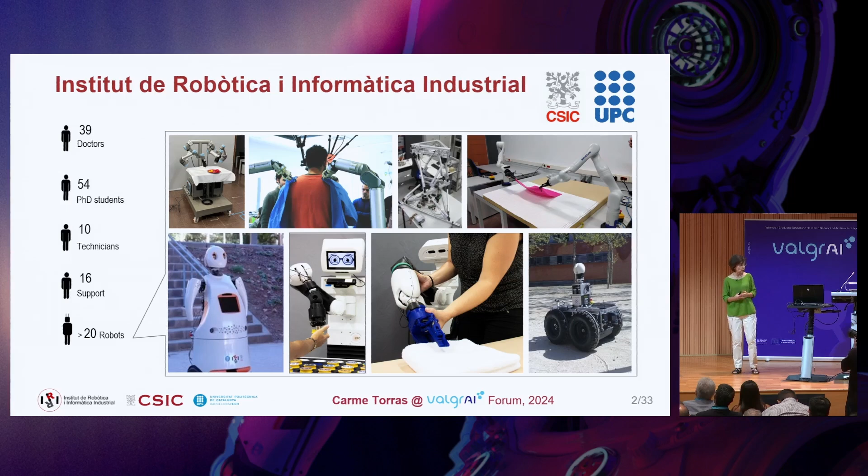As you see, manipulating clothes, helping people to dress, helping to fold clothes, etc. This is my research group. It's called RobIRI, namely Robot Perception and Manipulation at IRI.

We are a large group. At the moment we are 68 people, as you see. And I always like to highlight in red the women in each category, because we would like to be many more, even reach parity, but it is proving difficult. We don't reach 20%, which is very low.

So I take this forum to make a call. Most of the women here, I guess, are devoted to artificial intelligence or related fields, but it's important that more women get into technology, into developing technology, because technology is the future, so we'd like our perspective to also enter technology development.

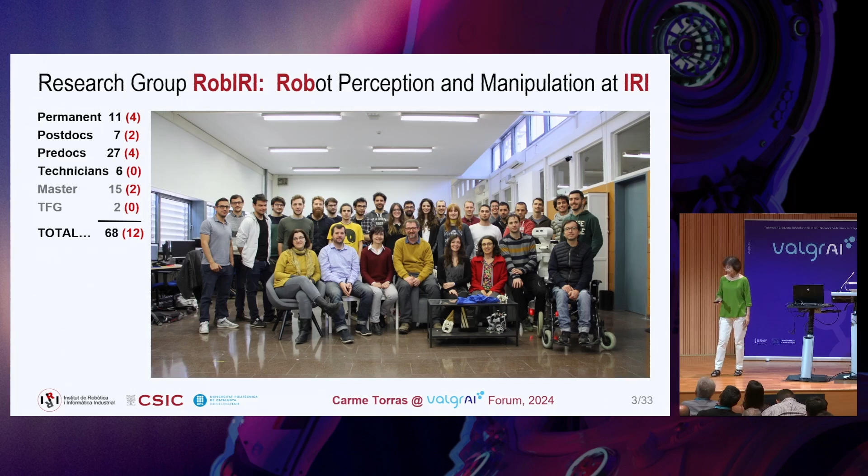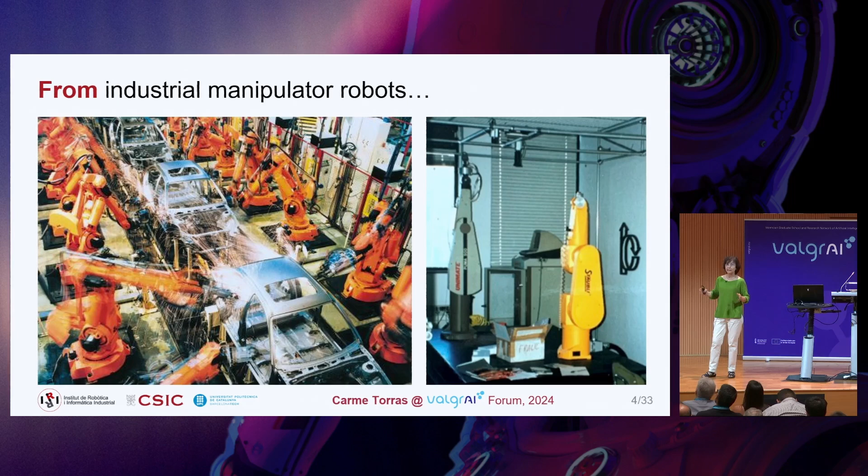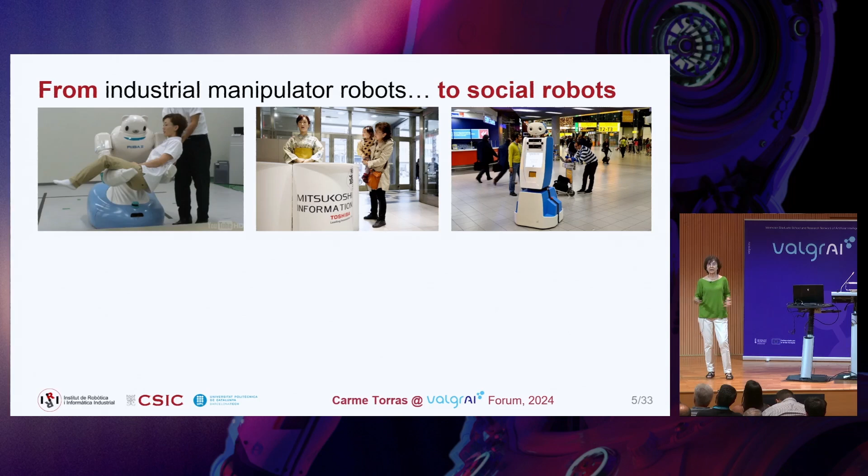Our group started in industrial robotics, in production lines, and the trend, like 15 years ago, was to move from industry to social robots. So there are robots that, for instance, move people from a wheelchair to the bed. Robots that are receptionists, that guide in large spaces like airports, and these are a bit more conflicting type of thing. Robots that are companions for children to play, robot nannies, and also robots that help teachers at school.

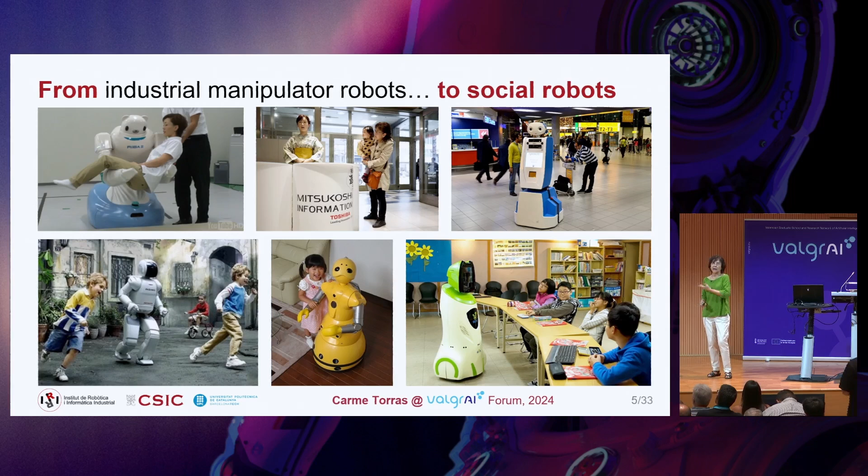Some of these are real in the sense that they are operational already. Within our research group, we got a project. We made this shift from industrial robotics to social robotics, thanks to this ERC project called Cloth Manipulation Learning from Demonstration, where we could build this lab, the largest one, in which there are several robots.

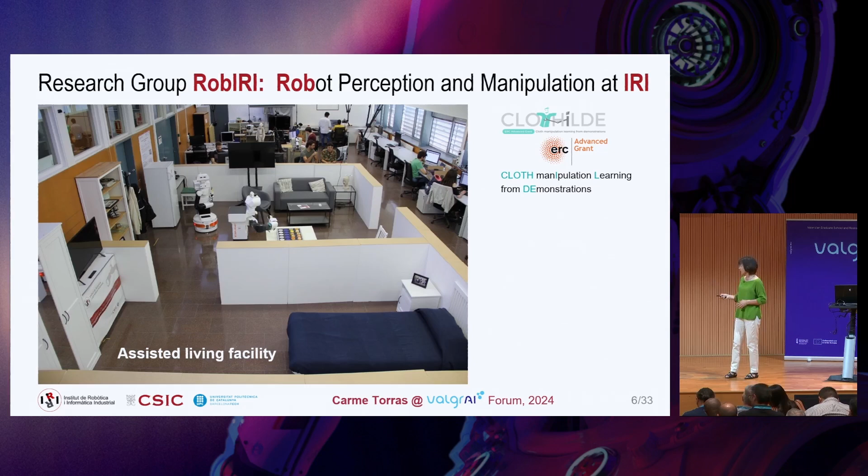At the end, we built this mock-up of a flat with two rooms: a bedroom, where you see a bed and a cupboard, etc., and then a living room, kitchen and dining room, in which you see two robots that give some service. This will help me show you some of the prototypes we have developed in this environment, thanks to other European projects we have got.

In this move from industrial robotics to social robotics, new challenges appear, most of them related to artificial intelligence. For instance, in industries there are expert programmers that program fixed sequences for the robot arms. In social environments, in assistive environments in particular, the caregivers maybe do not have programming abilities or even technological ones. So it's important that robots be easy to instruct.

Moreover, it's important to personalize. It's not production chains, but adapting the behavior of the robot to every person that needs some care.

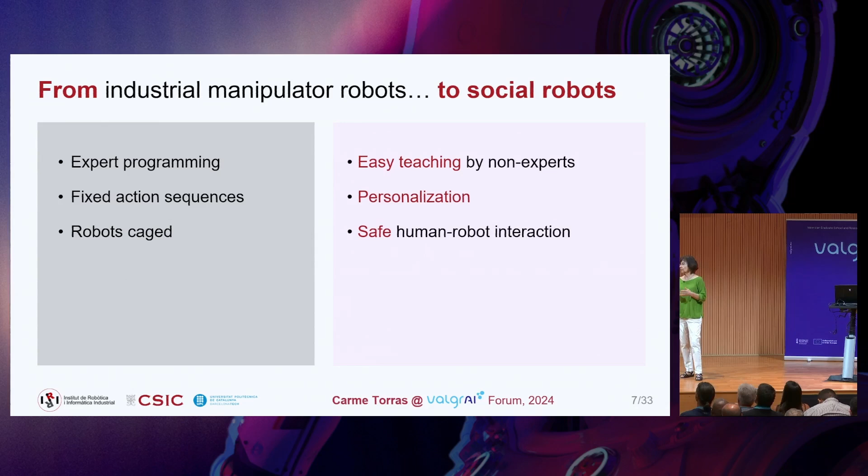In industrial environments, robots are usually caged with sensors, and as soon as someone enters this space, everything stops. Of course, if we like to help people dress or eat, or feed people, robots are very close to people, so we cannot stop activity. So it's important for robots to be intrinsically safe for humans.

Another particularity is that in assistive environments there are lots of textiles, clothes, and maybe cables or all sorts of deformable materials. While in industry, what has been basically solved is the manipulation of rigid objects, because for rigid objects, with just 3 degrees of freedom of position and 3 of orientation, if you have the model of the thing, the location and orientation is fixed. While for deformables, they have an infinite dimensional state space, so it's a much harder problem to plan motions in this space.

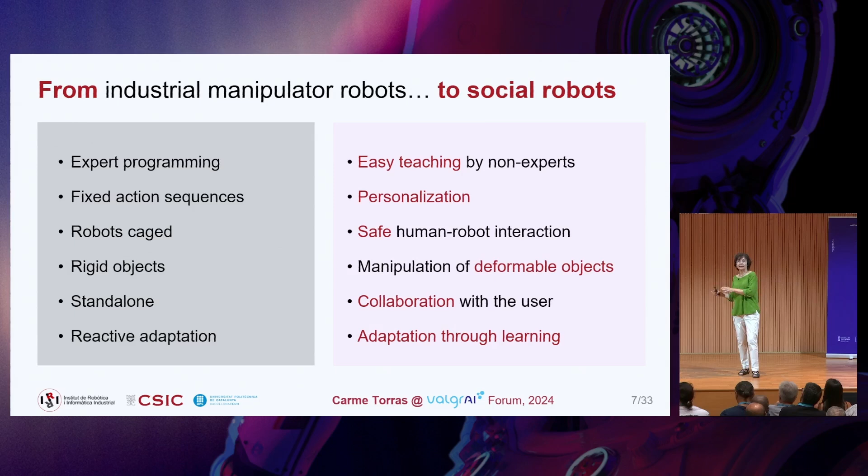The robots in industry are usually standalone. They work independently of people, separately from people. In social environments, they are constantly interacting with people, so they need to collaborate. Finally, the type of adaptation or learning is very different. In industry, it's just reaction to changes in the environment, while in assistive environments it is very important that they adapt through learning, lifelong.

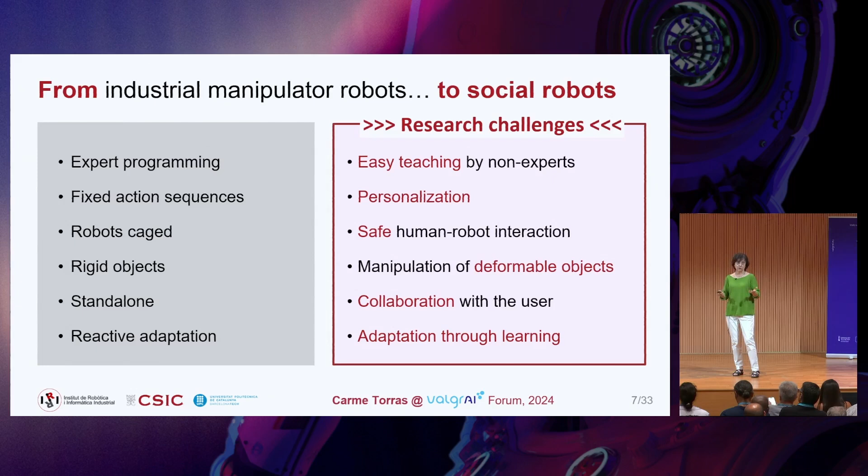So you see, these are the important research challenges we are facing in social robotics and assistive robotics in particular. I will exemplify each of these challenges with one possible solution we are developing.

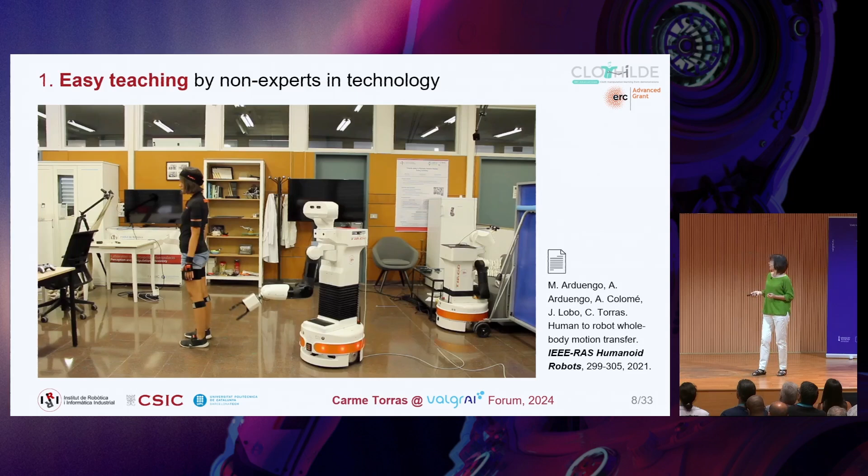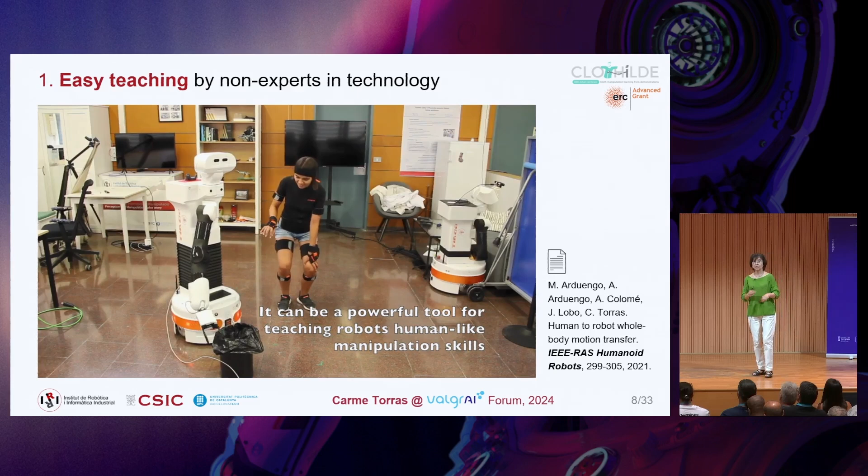For instance, for easy teaching, in our lab we teach the robot through imitation of a person. You see this girl, she wears motion capture devices on her arms and legs, and essentially the robot mimics her movements.

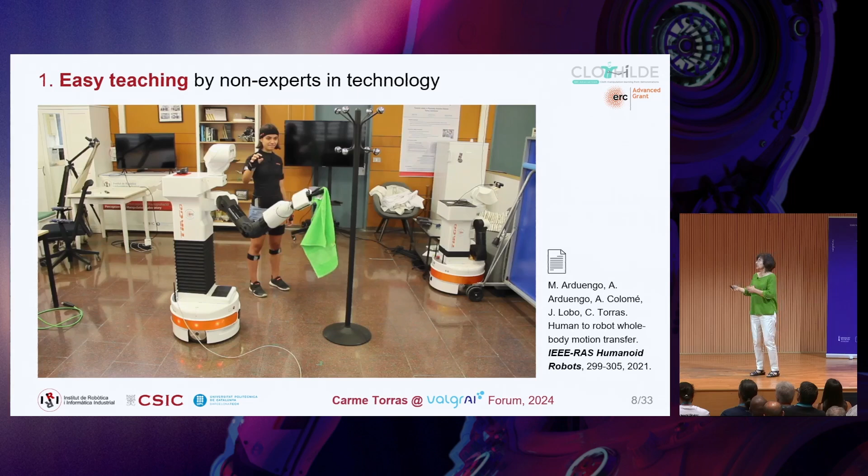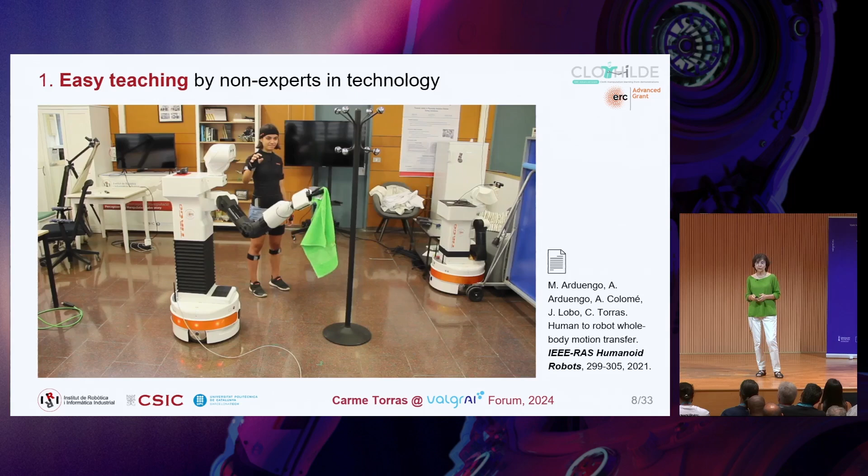This requires a transfer from the kinematics of the person to the kinematics of the robot. Afterwards, the robot can improve and make the motions more smooth through, for instance, reinforcement learning. I put on the side the different papers for those of you that would like to know more about each of these works.

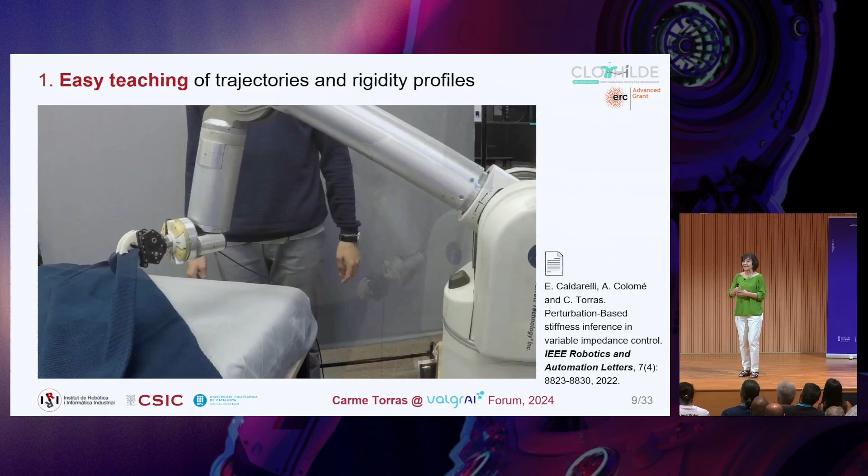Easy teaching is also involved in teaching forces, or what we call rigidity profiles. Because, for instance, to make beds, there are some motions in which you need to be very stiff. The robot needs to be very stiff in order to remove wrinkles, for instance. But there are other motions in which it can be free, meaning it's not necessary that the robot stays rigid, even if it's disturbed, nothing happens.

Oh, sorry. What happened here? Well, it's not very important, but maybe I did something wrong. This one works.

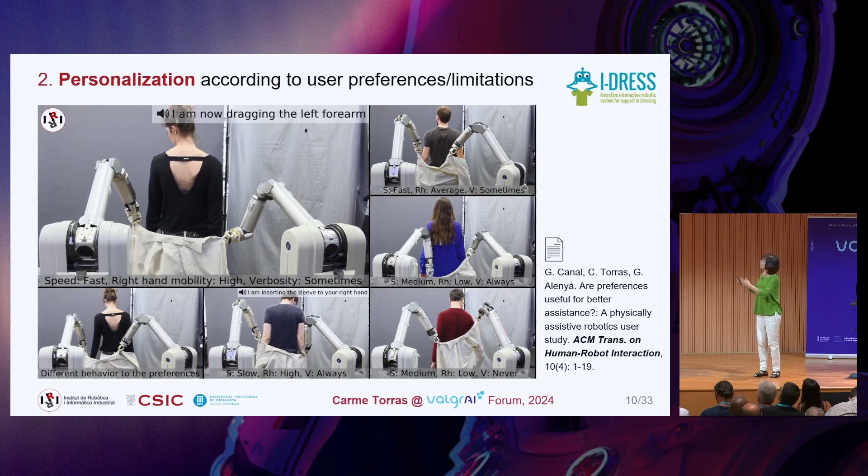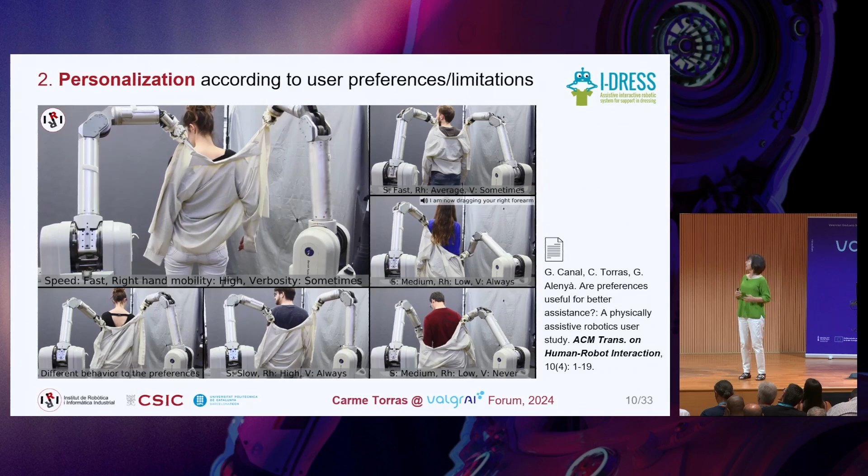We jumped to another prototype. I'm showing another challenge, which is personalization in dressing people. You see that there are several different things that can be adapted, for instance the speed at which someone wants to be dressed, what mobility limitations they have, for instance left arm or right arm, whether they want the robot to explain every motion or they can be quicker, and each one is taught differently. Well, our robots speak.

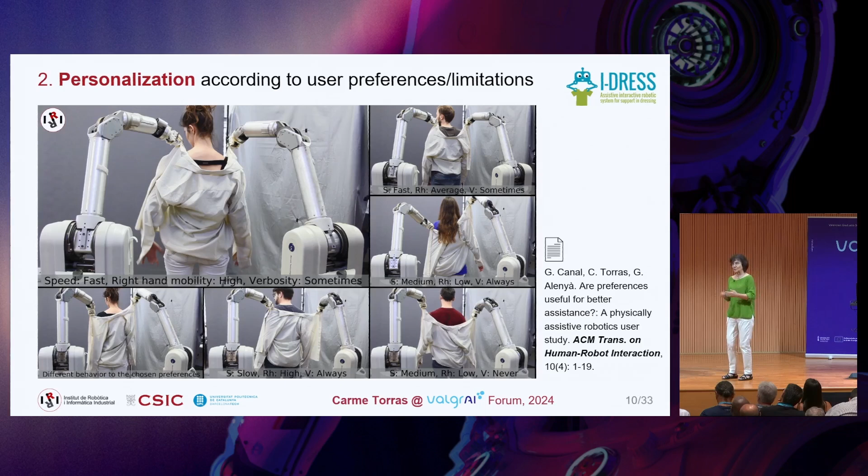I didn't put the voice on because I cannot speak on top and it gets a bit slow.

Another type of personalization is that usually this type of robots will come from factories with a repertoire of trajectories and actions already pre-programmed, but they need to be adapted to the particularities, physical and psychical, of people.

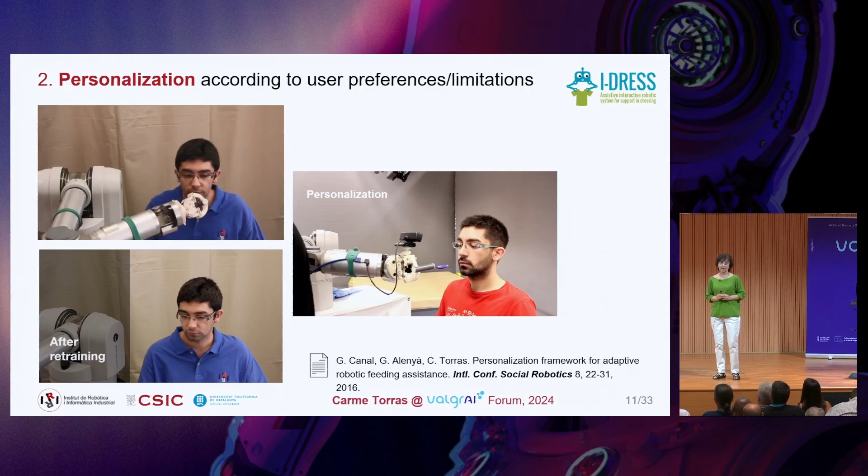So, for instance, in a prototype of a feeding robot, we applied this. This is how it came from, presumably from the factory, and you see it's not very comfortable for the poor guy. Then it was personalized. In this case, the caregiver could adapt the timing and the different positions of the arm, and then after retraining, it's much more comfortable for the person to eat.

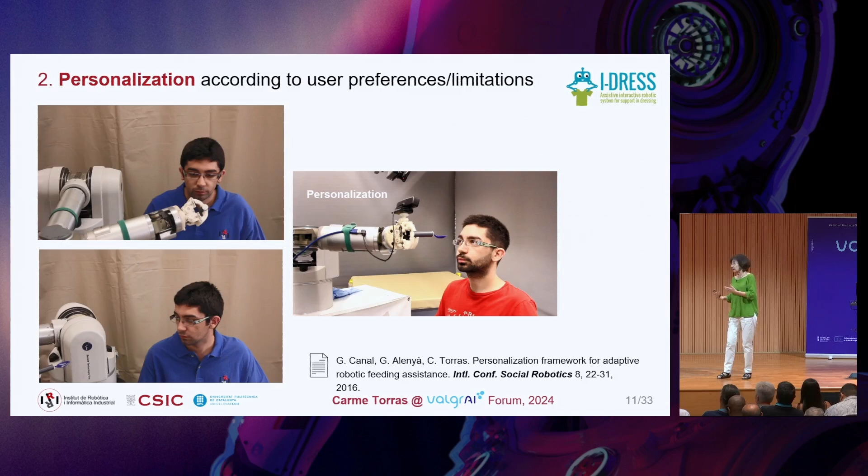So this is just adapting a physical type of thing, but the same thing can be done in cognitive personalization. Coming to the next challenge, which is safety, very important in this context.

We exemplify this through putting a scarf on the neck of a person, without... well, I don't know the name now, but you understand. You see in the left one how the caregiver teaches how to put the scarf around the neck of the mannequin in this case.

The robot can exercise. There is a camera on top and a cost function that measures how well the robot is doing, and the robot can keep exercising the skill until it is good.

And then what is most interesting is the right side, that you see black now, in which it puts the scarf on a person. This person, you will see, can disturb the robot, and the robot keeps doing the task without making any harm to the person.

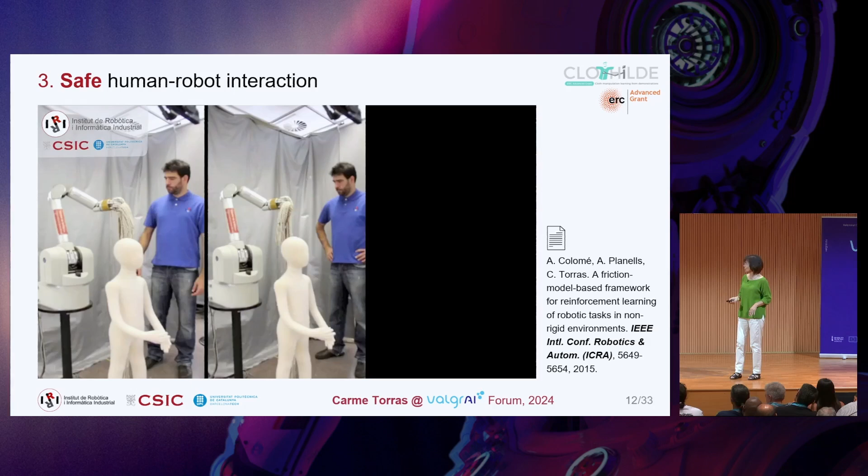They run in parallel, and this is why I'm telling you what you have to look at in each of these frames. You see that on the right, the person disturbs the trajectory, and the robot keeps doing the task.

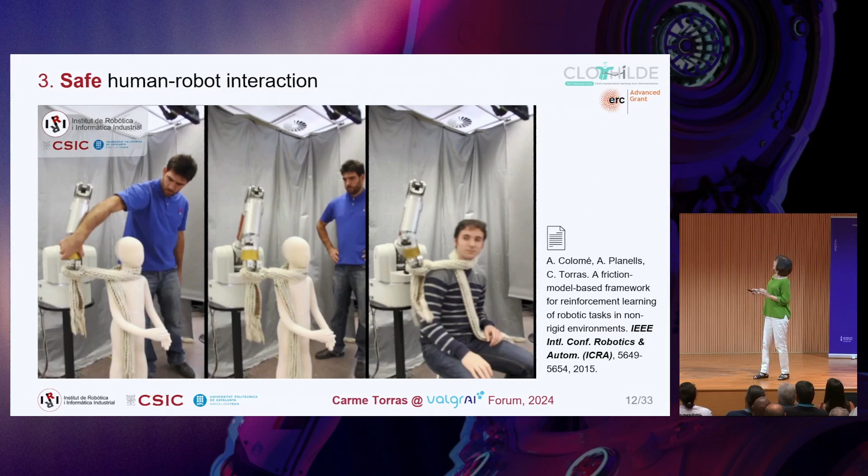Okay. Well, he was taking the risk because he's the one developing the prototype.

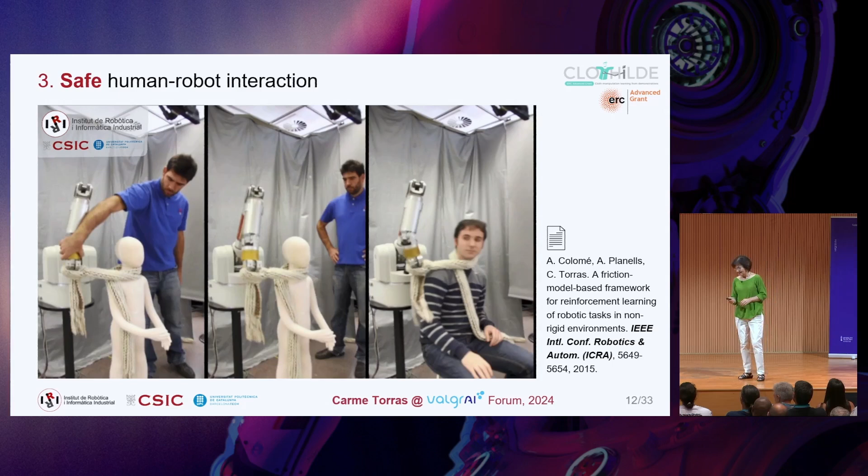Another huge area of research is the perception and manipulation of deformable objects, as I mentioned before. This entails even introducing new types of manipulation that for rigid objects do not have any meaning.

For instance, when we put a tablecloth, we sometimes take one corner, then slide through the border to reach the other corner, and then we do like this. This wouldn't make sense to do with a rigid object because the corner is always at the same place. So new manipulations need to be added.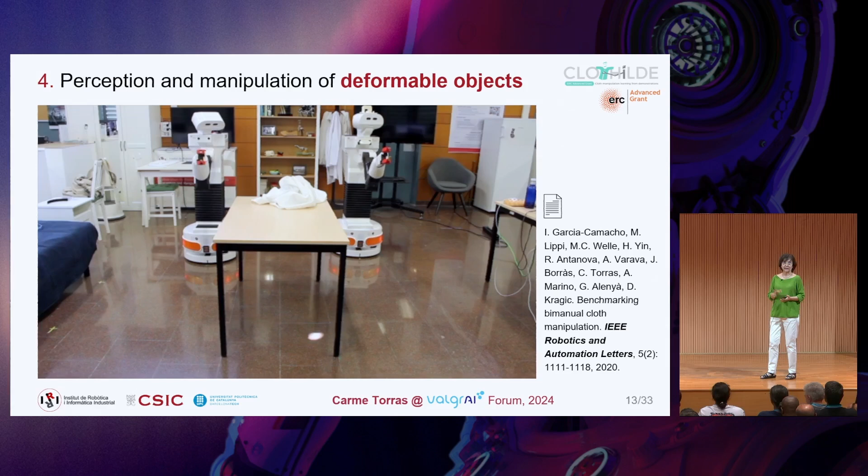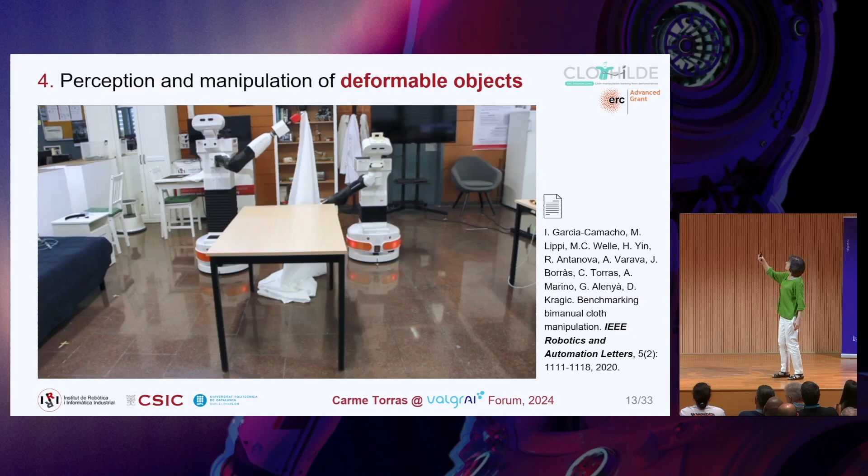And we'll see new grippers as well. Here you will see exactly this: one robot takes one corner, and then the other robot, because this is a big tablecloth and the robot doesn't have large enough arms, follows the border up to the other corner, and then together they put on the tablecloth. A similar thing we do to put the sheets on the bed, etc.

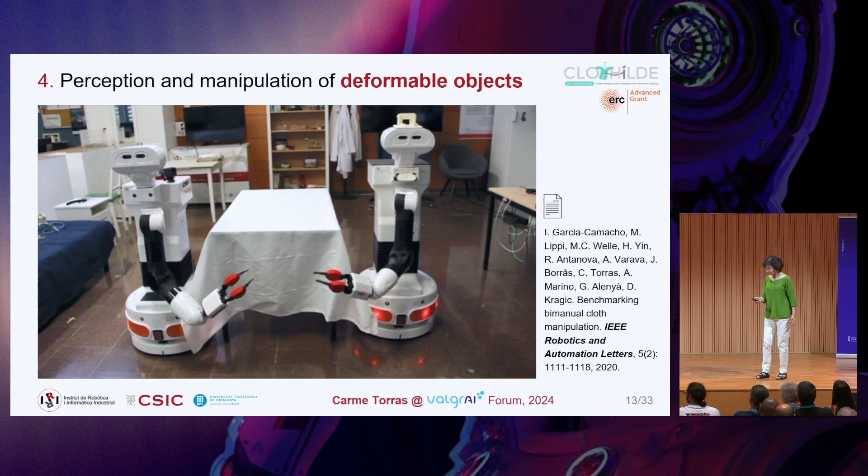This led us to develop a whole taxonomy of possible grasps that make sense for these deformable objects, quite different from taxonomies developed for grasps of rigid objects. We tried to be very systematic, only taking into account point contacts, line contacts, and plane contacts, and all their combinations.

This gave us a taxonomy that we have followed. We then looked at all the grippers in the market or in research labs to see which of these could be implemented, and it turned out all were very specific for particular applications. We wanted something more general and versatile, as needed in assistive environments.

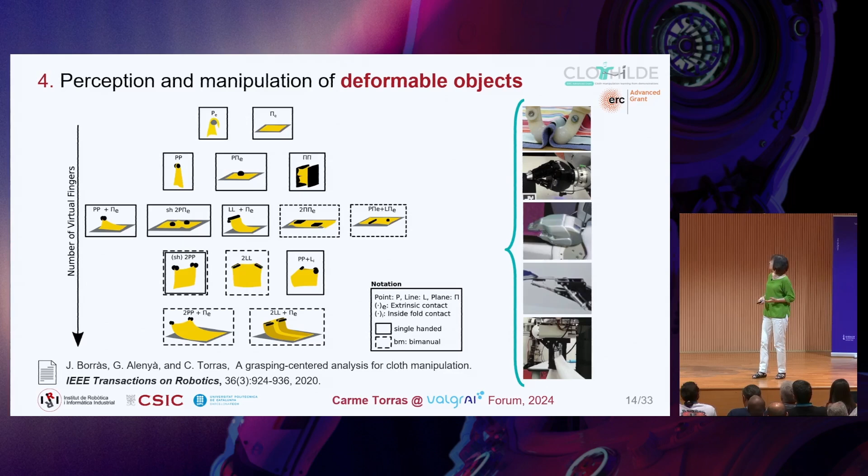So we developed this gripper, which has the possibility of making a point-point contact, a line-line contact, a line-plane contact, and a plane-plane contact. It works as you see. The plane contact is implemented by opening these two fingers that open a plane, and we also needed some friction.

For instance, in the application of following a border, you need low friction to follow and then high friction to clamp the corner. This is implemented through a piece that comes up and down from this upper finger, and we have applied this in several contexts.

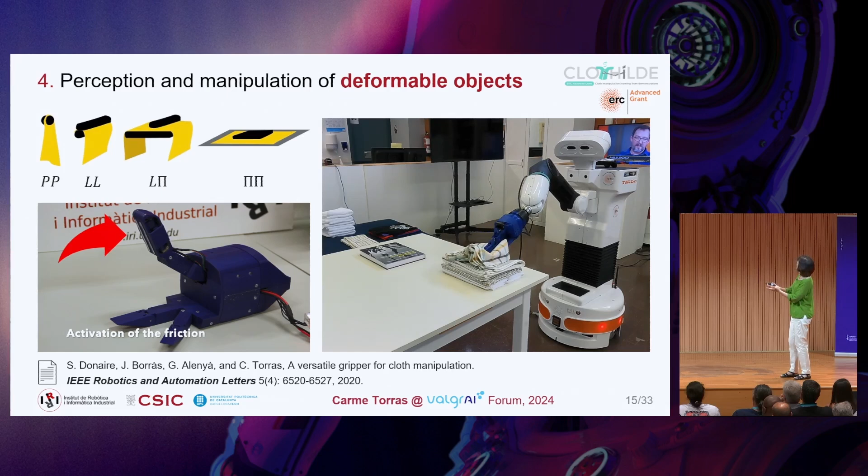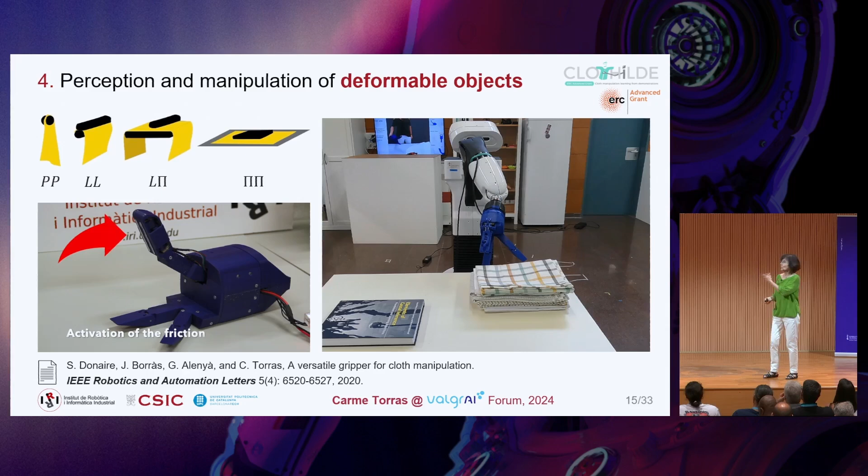For instance, piling cloth: if you don't open the lower fingers, you don't make the plane, and it doesn't work very well, as you saw. When you open them, it does the work pretty well. We have demos for other particularities of the gripper.

I want to emphasize this work on perception and representation of the states of cloth, because it's an infinite dimensional configuration space, with infinite dimensional deformations, so it's very hard to navigate in this environment. It's very costly computationally, but we have an advantage.

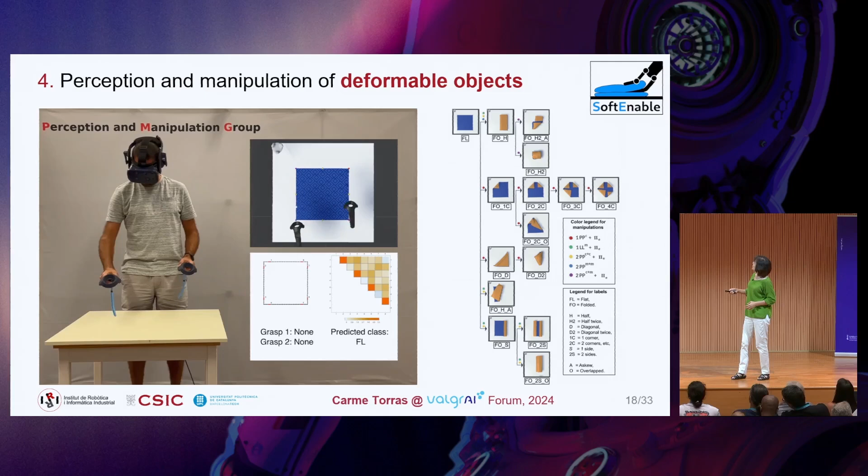So you see that as this person manipulates and folds the cloth, automatically, since we know the position and orientation, we compute this representation of the macro state. Then we can build graphs of the different states, and for further manipulations of folding in different ways, we can plan through these graphs. So it's a very handy way to teach how to manipulate different types of cloth.

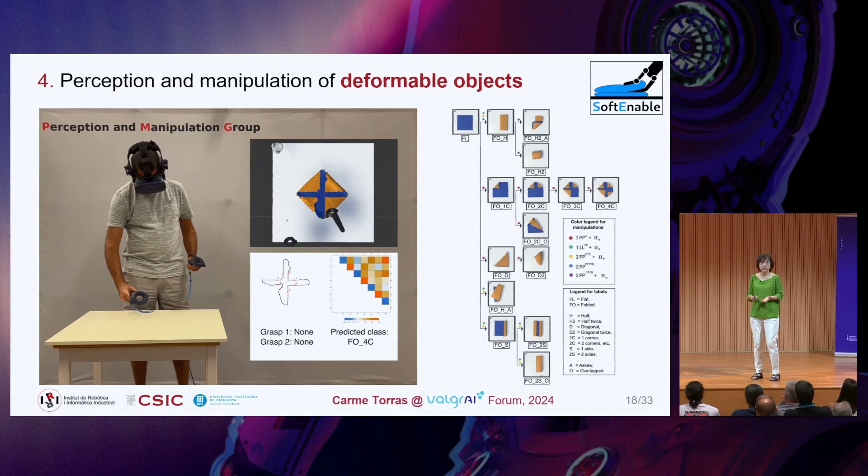With this, I jump to the following challenge, which is collaboration with humans. I show this through the application of helping to wear shoes, since elderly people sometimes have this difficulty because they cannot reach, but otherwise they can live autonomously.

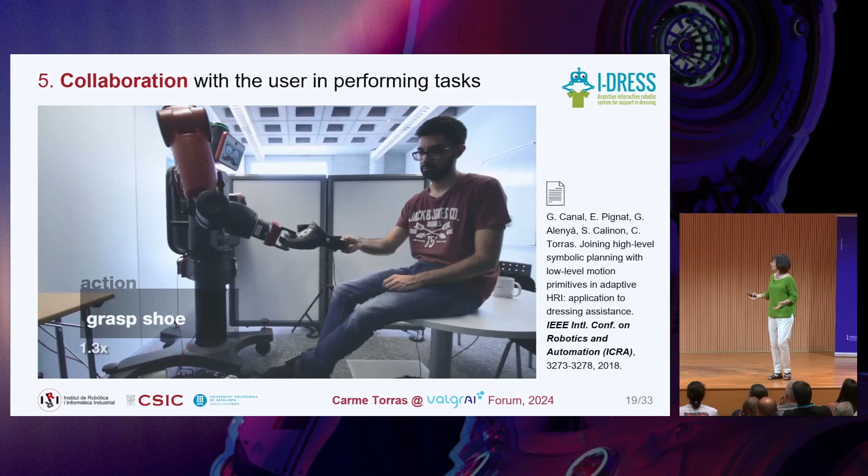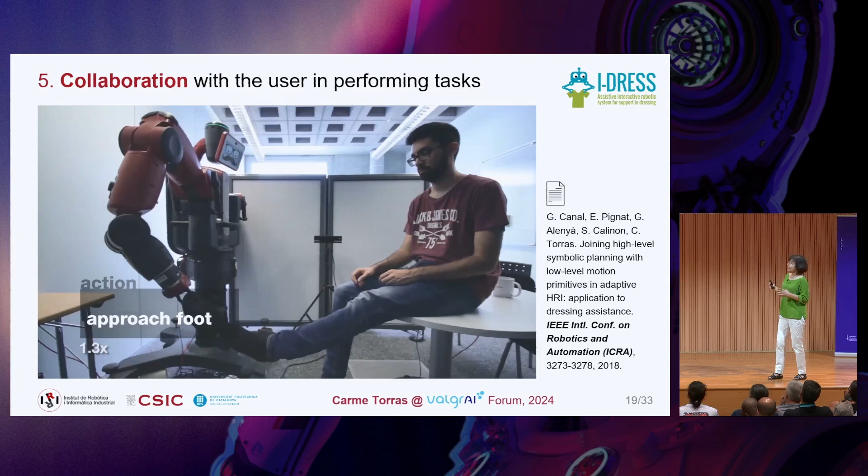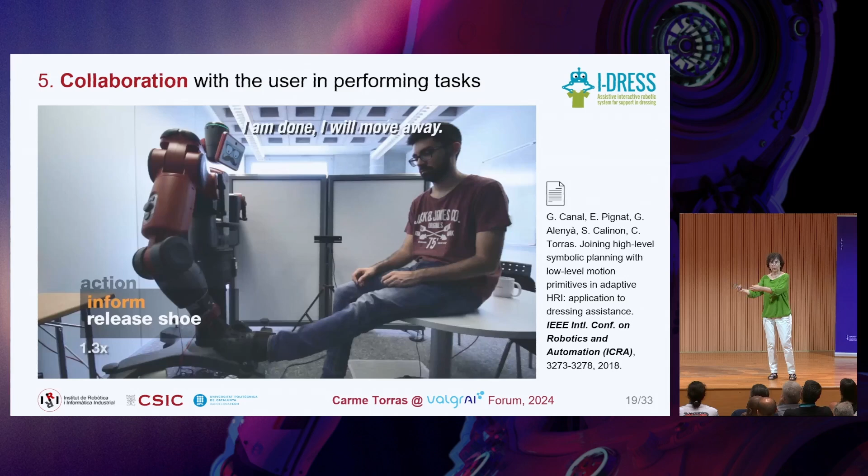So if they can have not such a complex robot, but a device to help them wear shoes, it will be very handy. The robot at all times informs first that it is a machine: I'm a machine, I can help you. I will take the shoe from your hand and put it onto your right foot.

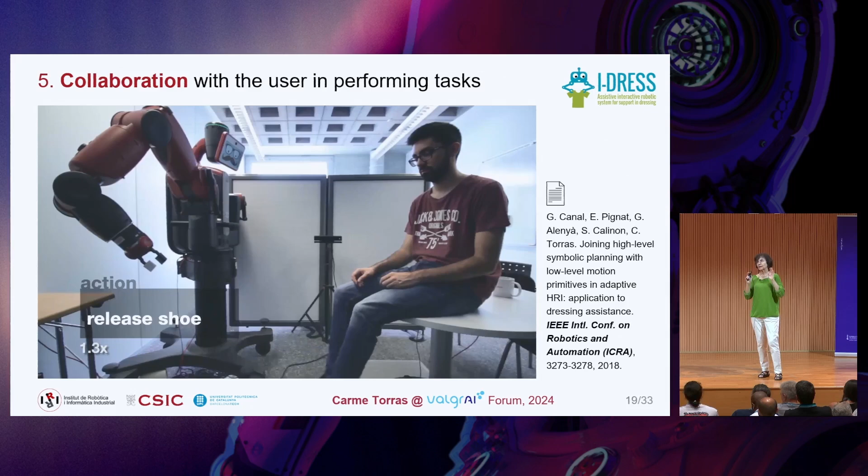Are you comfortable? It keeps informing, because the person has to feel always in control of the situation. If he gets afraid and withdraws the foot, the robot stops and says we can proceed more slowly or in another way, and so on. It's very important that the person always feels in control.

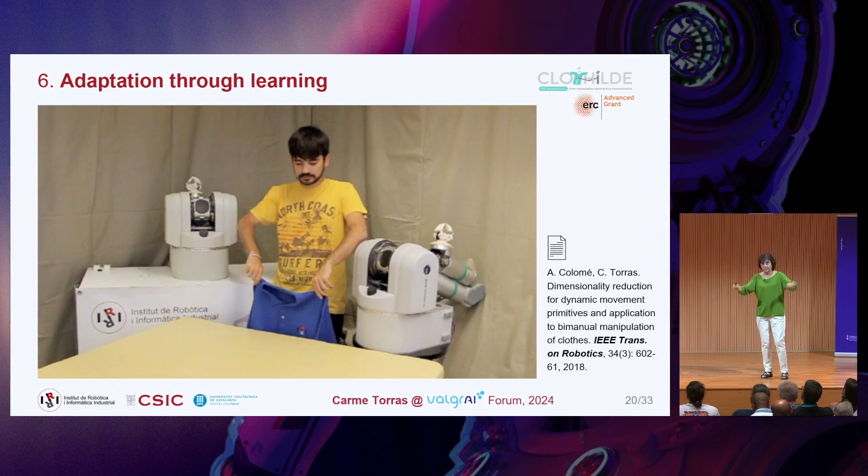And finally, the last challenge, as I said, was adaptation through learning. Here we fold a polo shirt by driving the robots to do it, as you will see. It's a task that for humans is sometimes a bit difficult.

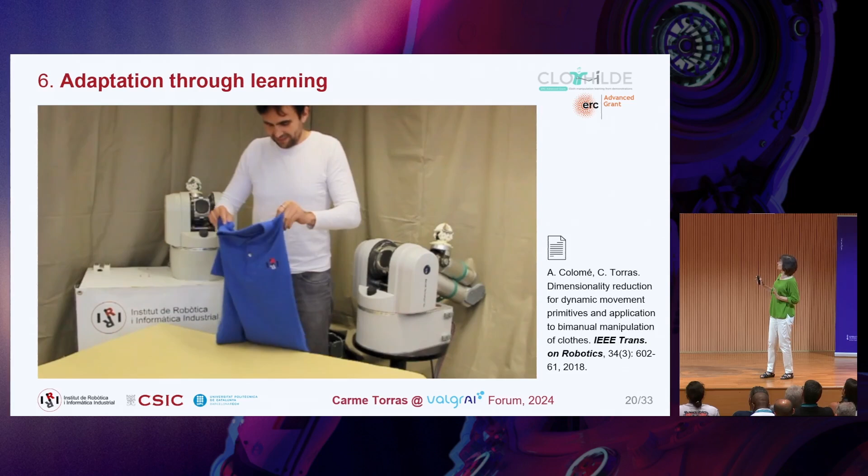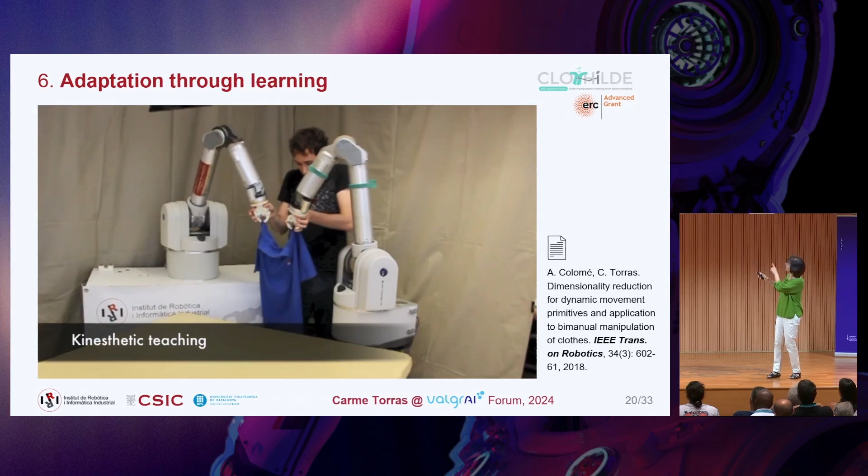As you see, this researcher has some trouble doing it, but he's the one who was doing this research, so he's good at it. However, when he does it with the robot arms, they oppose certain resistance, so he doesn't do such a good job.

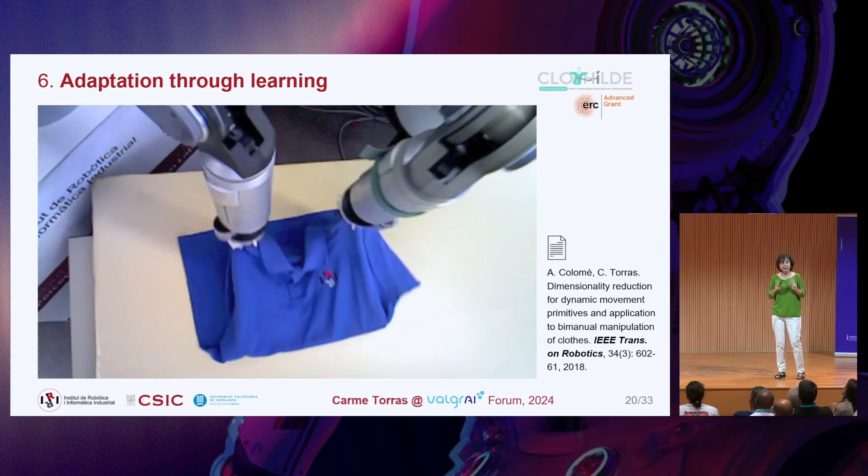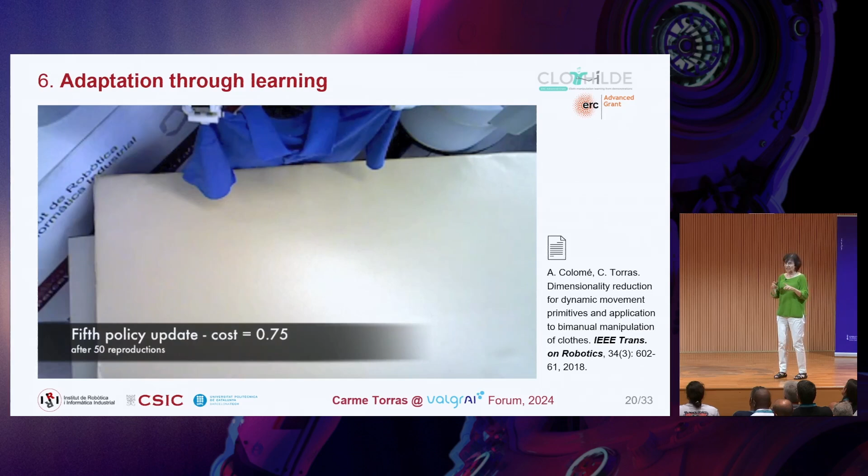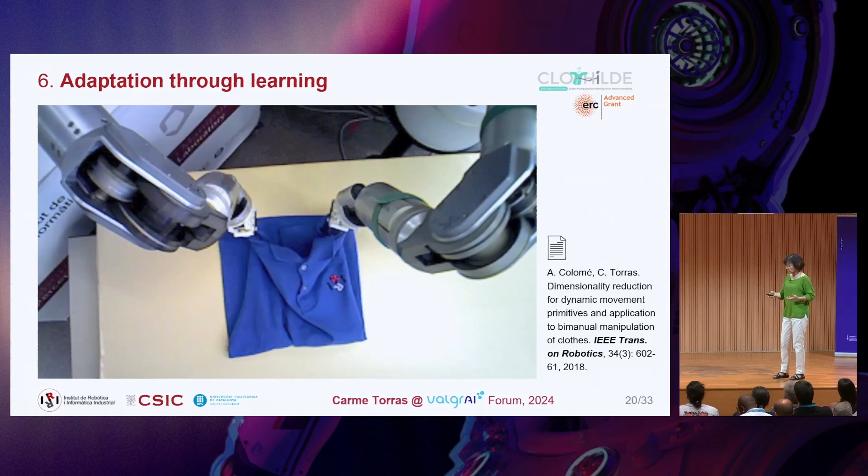So it's important that the robot can learn from not very good demonstrations. The way it does this is that there's a camera and a cost function that measures whether the t-shirt is in a square or rectangle, that it has no wrinkles, and so on. So it keeps trying, and through reinforcement learning, it learns to do a quite good job.

With this, I jump to the following topic, which is co-creation, because these prototypes are very nice and gave rise to many papers and PhD theses, but if they stay at our lab it's no use developing them. So once we develop something showable, we go to some possible end user, some healthcare facility, and demonstrate them to see if we can engage in co-creation of these prototypes. This gave rise to Labora.

Labora is an open lab for robotic assistance, and we have several associated partners that come from administrations, research institutions, technological centers, assistive and healthcare organizations, and also robotics and technological companies, because we need companies. We made this association called Labora, and we started to develop some bilateral, trilateral, etc.

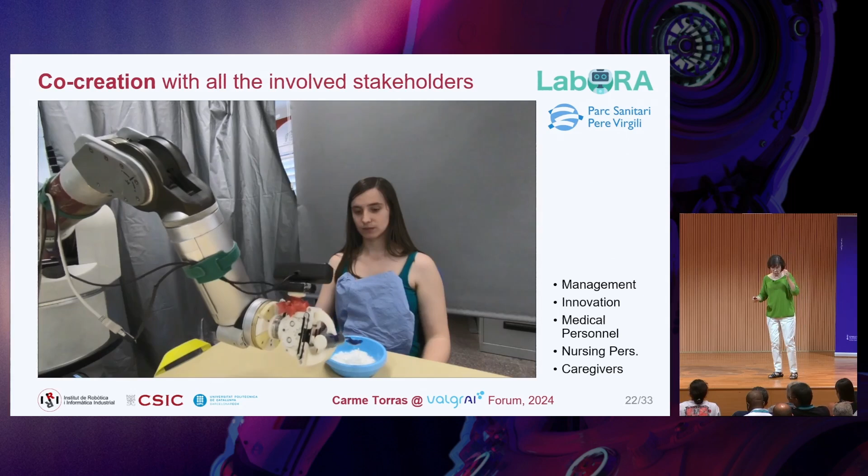You will see that we used our robot that has this anthropomorphic arm with a force sensor in the gripper and a camera, and as soon as the person opens the mouth and looks at the camera, the robot feeds.

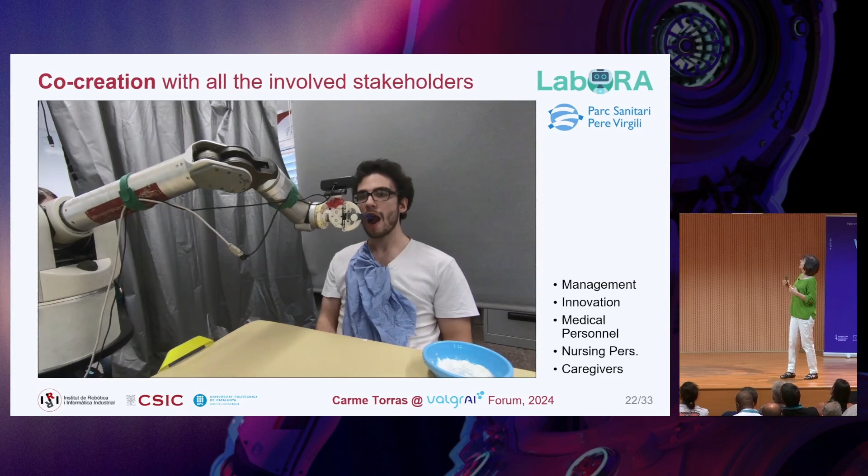You see, they play all sorts of games in our lab. So this guy closed his mouth, and the robot withdrew, and then came back. And this one closed his mouth at the moment the robot was with the spoon inside the mouth, so the robot didn't break the teeth of the person, which was good. It stopped for a while and then withdrew.

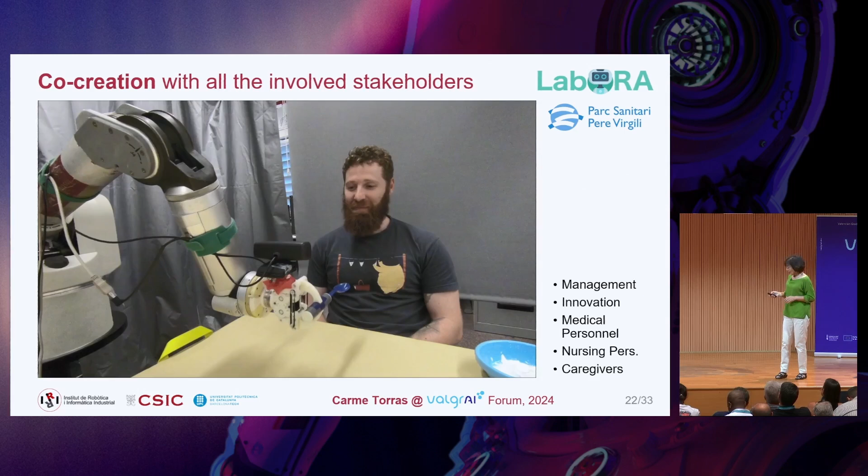We showed this prototype in Parc Sanitari Pere Virgili, which is a very large sociosanitary facility in Barcelona. We showed this prototype and others, like the dressing one, and they said, oh, this is the killing application. We need this, because 50% of our patients need this feeding assistance.

And we, the caregiving personnel, do not have enough time to feed them. Some have trouble, some have dysphagia, they cannot swallow very well, so in 10 minutes they cannot eat, and we do not have more time. So we ask families to come at lunchtime to feed them. But they come very quickly, just feed them, and quit to work again. So it's not very pleasant for the patients.

So we started together with the management of this facility, the innovation unit, the medical and nursing personnel, and also the caregivers and patients, to see what else should be added. The first thing they said is, they cannot only be fed with a spoon. We need a fork, we need to be able to drink, to provide...

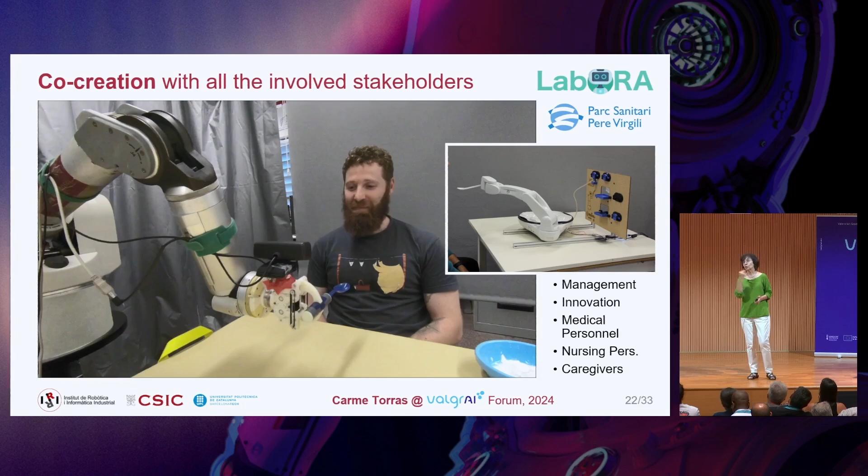Well, something to clean the mouth of the people. So we first developed a prototype. We miniaturized, as shown here, a very small arm with a plate with 4 dishes, say, and then there's a tool changer that changes all this type of thing.

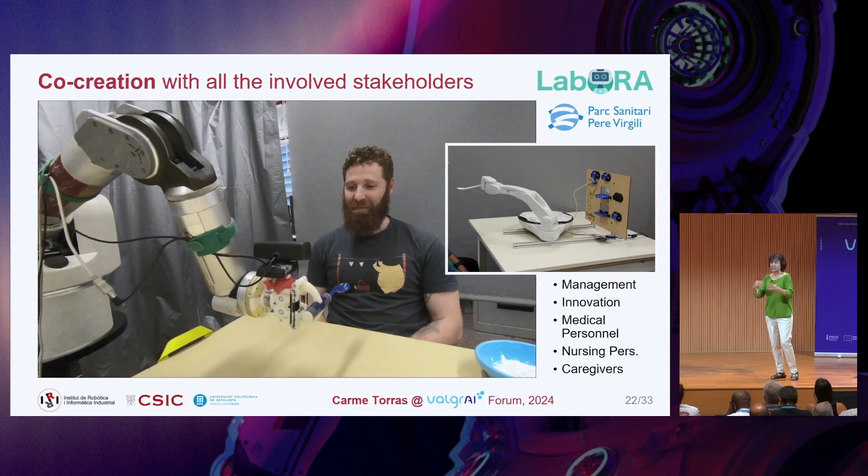This was developed through several iterations, and finally we conducted a pilot study with 60 patients at the facility. And you'll see here, we added also this tablet with a face, because this was a need expressed by the patients.

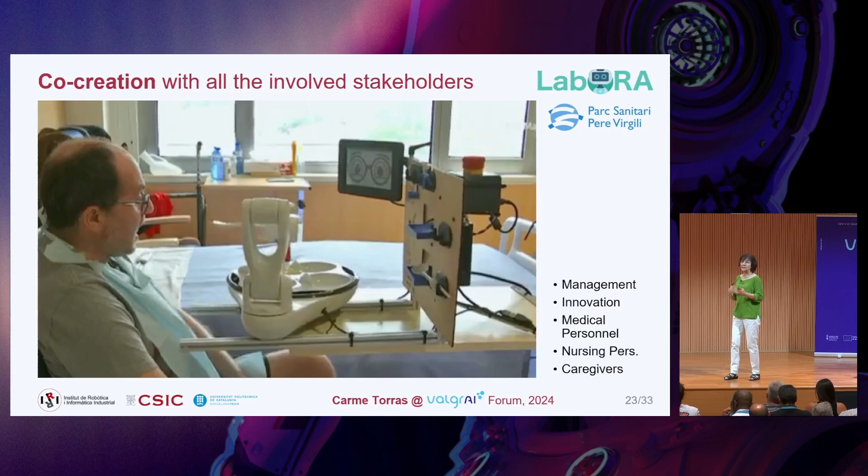They said, to hear some voice from nowhere, we don't like it. We like to be able to speak to something, so the machine says, I'm a machine, I'm not understanding you, but I'm going to help you eat, and so on. We introduced this face that gives some feedback to the person.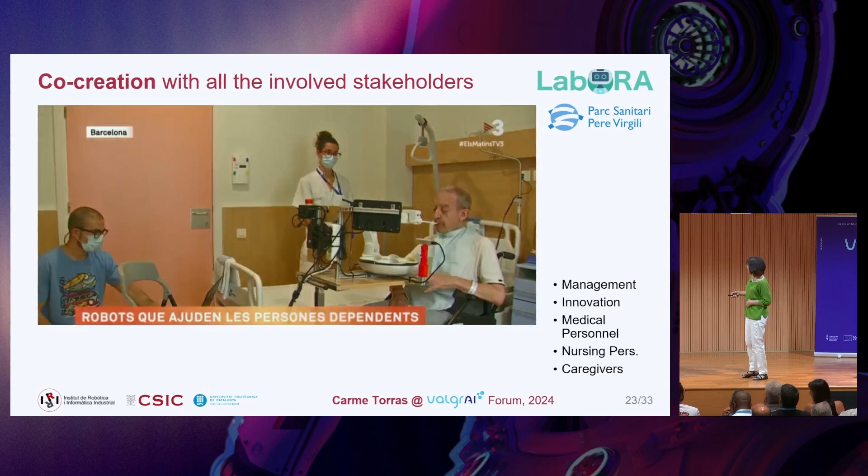So it was pictured on our TV. It works, so it became very popular in Barcelona, and it was featured on TV3. And several patients were interviewed.

All were very happy with this, and even one association of patients that at the beginning were very reluctant to this finally gave an interview in which they said, oh, that was a fantastic experience. One of these patients was saying, I'm very happy because now I'm autonomous at eating, and my son or daughter can come later at night to talk to me and give me

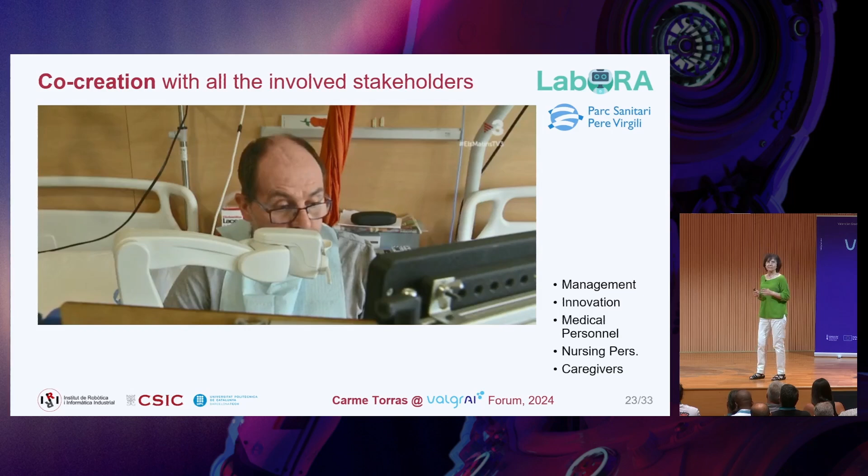good company, and not just feed me and run away. So it was a very good experience.

Well, I don't know how I'm doing with the time. Well, yeah, I'm doing okay, more or less.

Another experience of co-creation was together with Fundació ACE. Fundació ACE is an Alzheimer foundation in Barcelona that does diagnosis and treatment of mild dementias, such as Alzheimer's. In daycare facilities, they have about 20 patients and one therapist.

They play games through a board like this one with tiles that have numbers or letters, which can be organized in different ways, posing games adapted to the limitations of each patient. The therapist goes through different boards, as in chess, in simultaneous games, but cannot retain very well how each patient evolves.

So they wanted a personalized robot. We use the robot because it's the one we have at our lab, but of course it will be miniaturized as in the previous case, because it's only necessary to have a face and an arm to play.

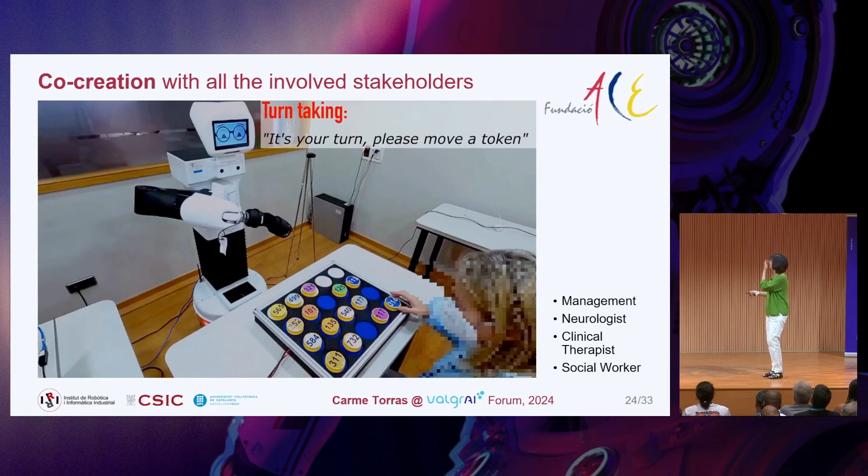We did this pilot study also, during the pandemic. The robot speaks again, but it is translated on top that you see.

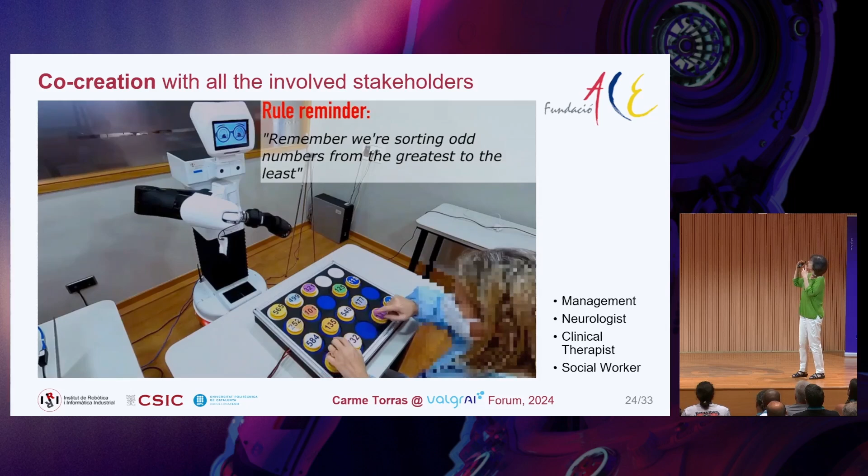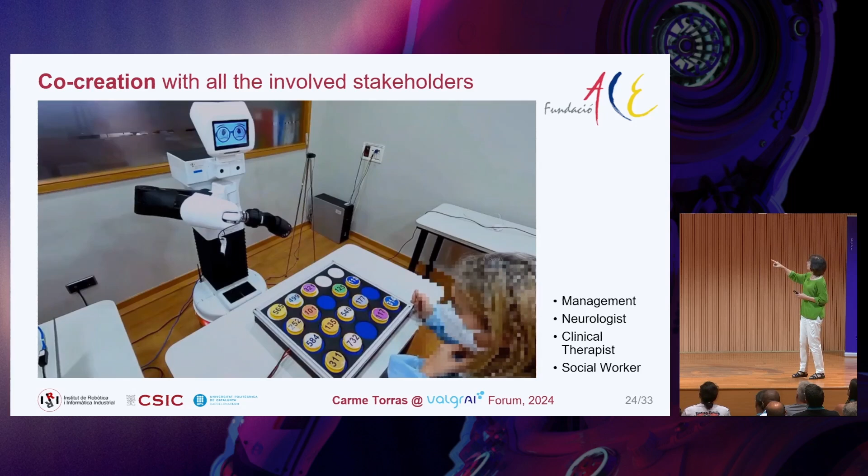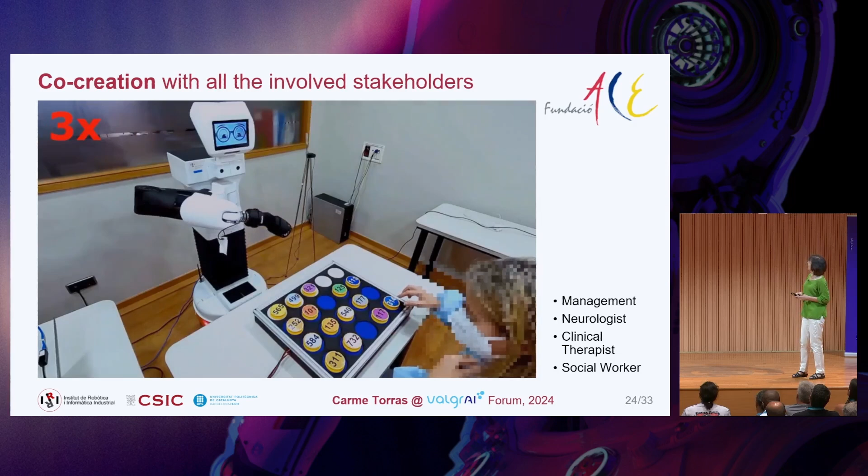The robot provides feedback. Through this face it can show whether the person is doing well or not, and it can provide physical help, saying you will find the appropriate tile here in this line. Then the person focuses on this line and maybe succeeds, and the robot also provides encouragement: very good, I love playing with you, and so on.

We thought maybe these elderly people with some mental disability would be reluctant to interact with the robot. At first we didn't have this face—there was no face, just two cameras looking at the person. The feedback was not so quick, since the robot had to speak, so people weren't so eager to interact.

But as soon as we placed this face with quick feedback, just through gestures, they all wanted to play with the robot. So fluid interaction is very important in this type of setting. Fundació ACE are very happy because they can record the whole history and evolution of each patient.

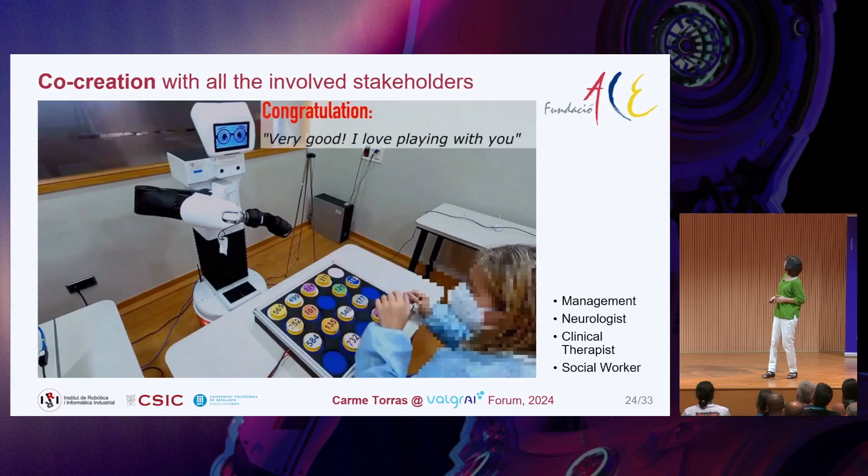More than regulation, I believe in education. I think education is crucial. Barbara Grosz, a professor at Harvard, says that by making ethical reasoning a central element in the curriculum, students can learn to think not only about what technology they can create, but also whether they should create that technology, developing critical thinking about technology.

Judy Goldsmith has been teaching a course on ethics in technology for several years using science fiction—I'm a big fan of science fiction myself. She says that using fiction to teach ethics allows students to safely discuss and reason about difficult and emotionally charged problems without the discussion becoming personal.

There are many resources on the internet one can use to teach ethics in robotics and technology in general. One is Teach with Movies, which teaches many things through film clips. There's a movie called Robot and Frank that can be very useful, especially in assistive robotics, because it's about a robot that assists an elderly person.

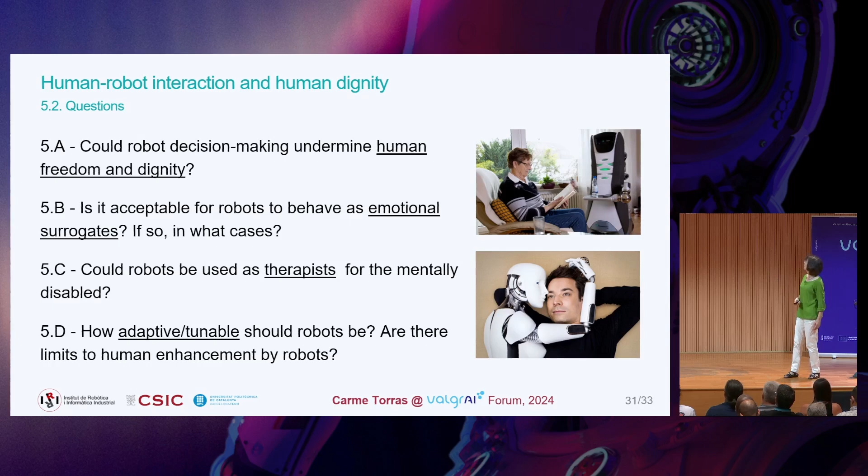Very quickly, we did a couple of publications related to ethics in social robotics and AI. One surveys the literature, and the conclusion is essentially that there's a lot on human-robot dyadic interaction, but not so much on a global perspective—for instance, how the entire healthcare system should work, how justice and avoiding divides because of wealth or different countries should be, etc. So there is a need to focus more on global issues.

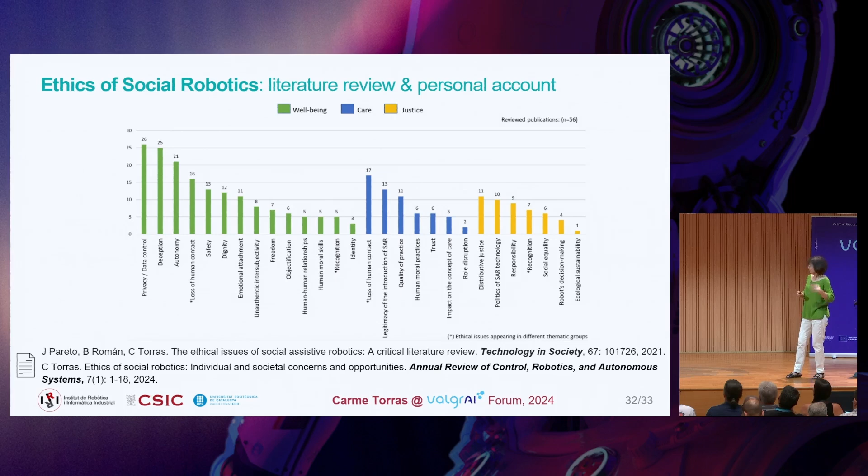I also wrote another paper on the differences between AI and robotics—social robotics—in the sense that there are opportunities for developing ethics in social robotics that weren't there in AI, because of the slower development of this technology. I explained this, and to conclude, I was at a European Social Services Conference last month.

I drew very encouraging future perspectives there. I saw that social services are beginning to invest in social robots, and this somehow solves or tries a solution to population aging and shortage of caregiving personnel—how elderly people could live longer at home with some technological aid. This is clear, as is clear that robots can take on routine tasks with no added human value.

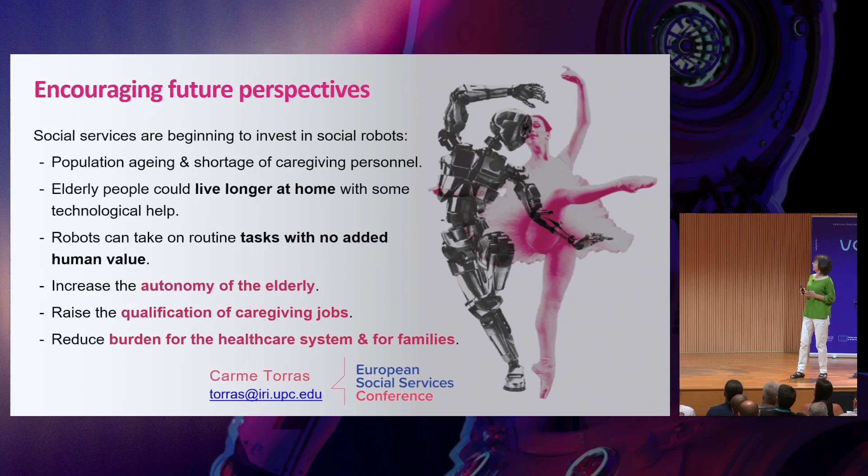So thanks to this type of robot technology, we can increase the autonomy of the elderly, raise the qualification of caregiving jobs, and reduce the burden for the healthcare system and for families. This is also true for AI in healthcare, as the previous speaker was showing. And with this, I conclude. Thank you very much.

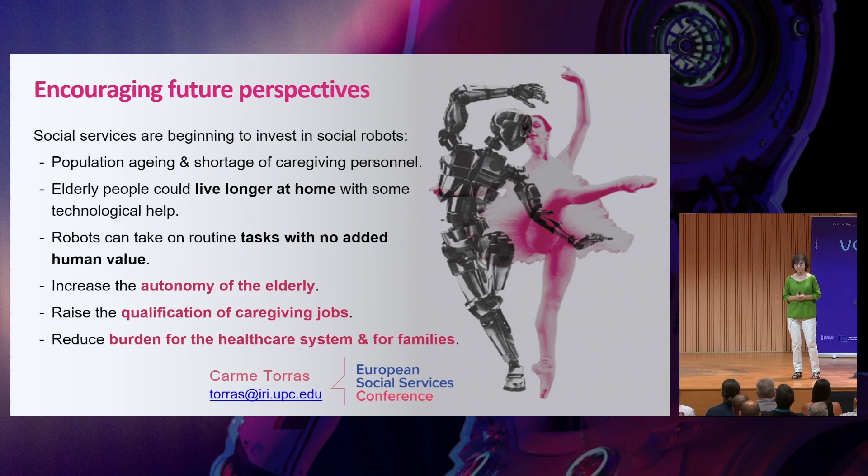One question, Carme: do you think it could be interesting or necessary for social robots to be empathic? Empathic with users?

Well, I only like them to be empathic in very particular cases, in the sense that it should always be clear that they are machines, that they're not cheating people into thinking they care about the person. There's a risk of isolation—elderly people becoming comfortable with an empathic robot and saying, oh, the robot will take care of everything, even telling family and friends it's not necessary that you come, I'm very happy with the robot. That happens a bit in the movie I recommended. So I think the robot should always make clear that it's a robot, not taking care of or empathizing really with the person.

This is especially crucial with children, because grown-ups understand that robots are robots and there's no problem. But children may be confused and think this companion is very nice because it always plays the game I like, never makes any problem, does my homework if necessary, so I don't need any other friends. This is very dangerous. You may think this is science fiction—it's not. Many young children already have virtual game companions or playing companions. I think this matters because the relations we make shape us the way we are, so if children don't get the right life experience in the windows of time of their development, they can't catch up later on. So be careful, as parents or as teachers.